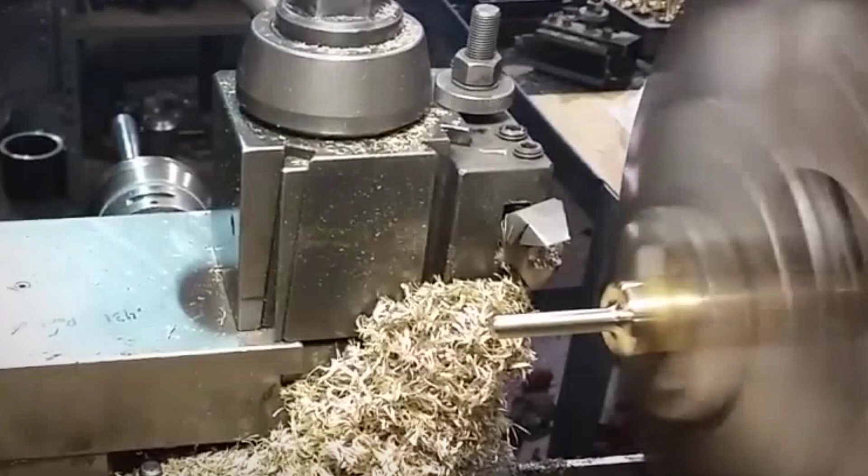There is a valve that costs $10 in raw brass to make. It has no rubber, no springs, no washers, and no seats to replace. It seals tighter the harder the water pushes against it. Victorian plumbers installed them by the millions. Not one was designed to drip.

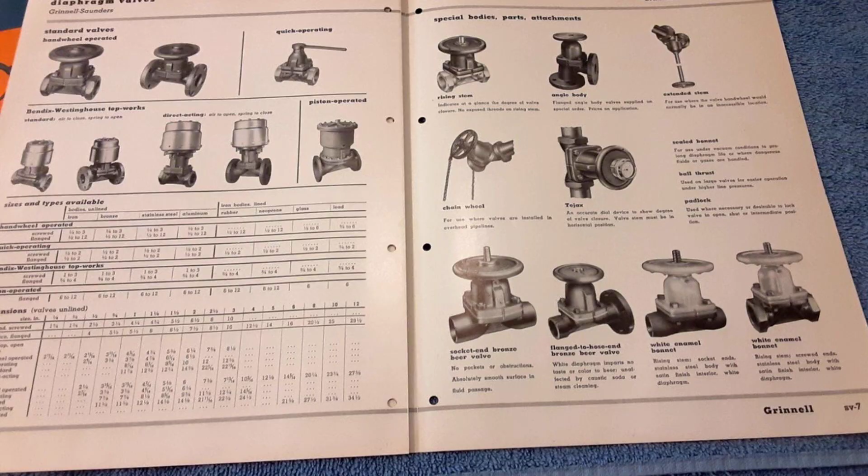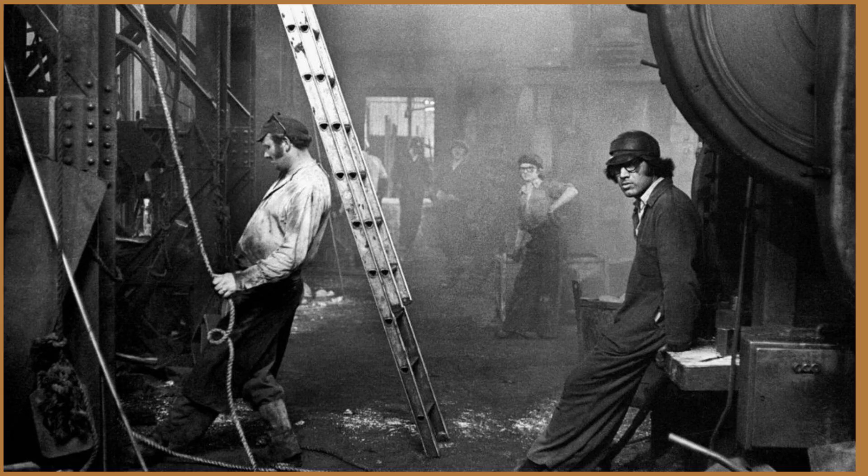We did not abandon this valve because it failed. We abandoned it because it never needed a replacement part. A valve that never leaks does not sell O-ring kits and does not bring the homeowner back to the hardware store every 18 months. This is the story of the ground key valve, the precision brass fitting that sealed itself with physics, and why the plumbing industry buried it under a mountain of rubber washers.

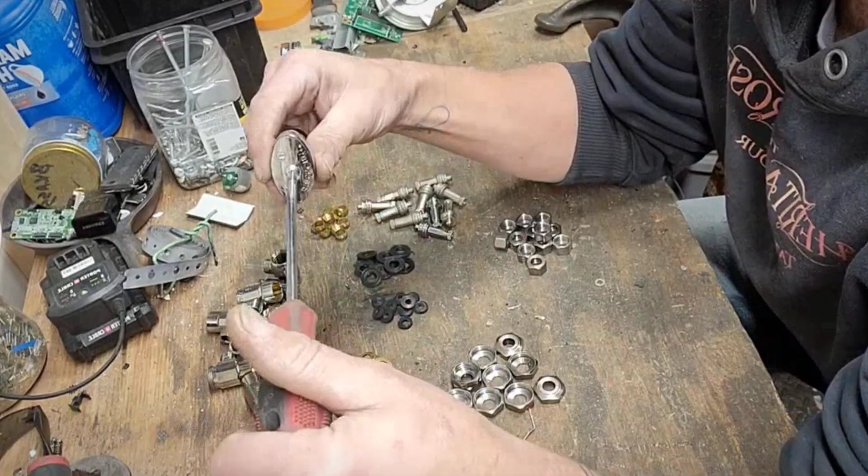In the ruins of Pompeii, archaeologists have uncovered bronze stopcocks with a geometry that feels eerily modern. Each artifact, now labeled in museum catalogs with accession numbers like 2019.142 or 1988.67, reveals the same principle: a conical bronze plug ground to fit a matching seat, turning inside a lead-lined channel. The Romans shaped these valves with a taper close to 1 in 6, about 9.5 degrees, a standard that would survive for nearly 2,000 years.

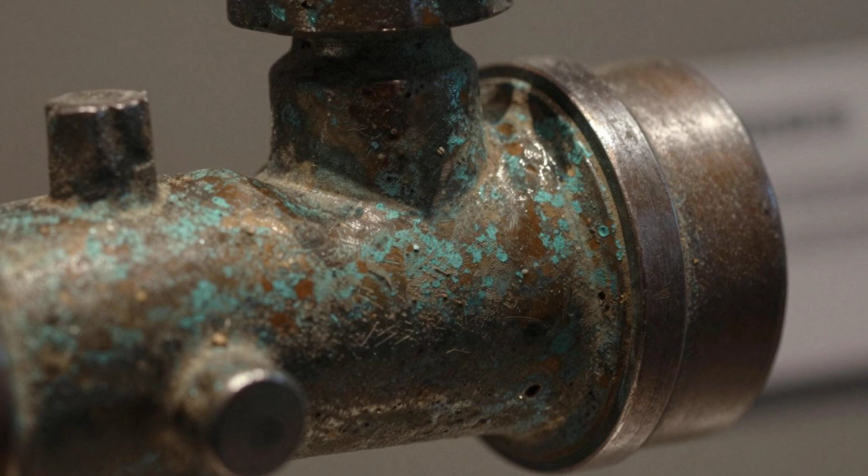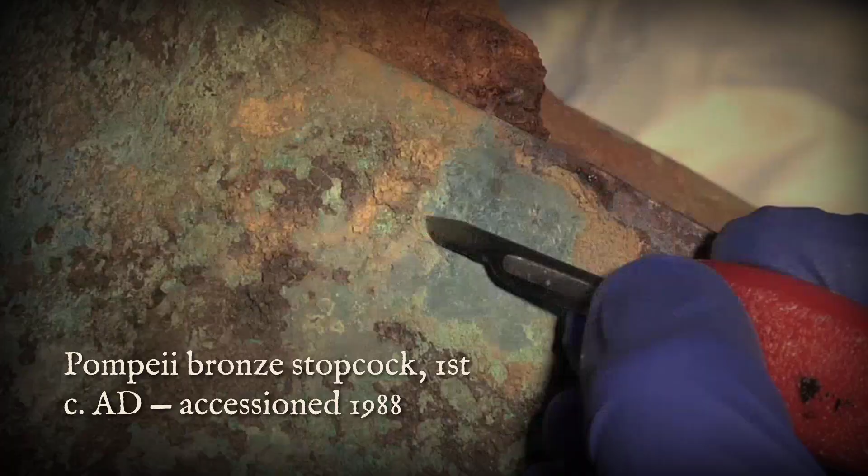Excavation reports from Pompeii's waterworks describe seats that still bear the marks of repeated use, their surfaces polished by centuries of opening and closing. Even after the eruption, after centuries underground, the conical sealing faces remain intact. The Museum of London holds a Roman stopcock accessioned in 1988 that still fits tightly in its socket. The patina has darkened, but the engineering is unmistakable. The bronze key can be withdrawn, cleaned, and reseated.

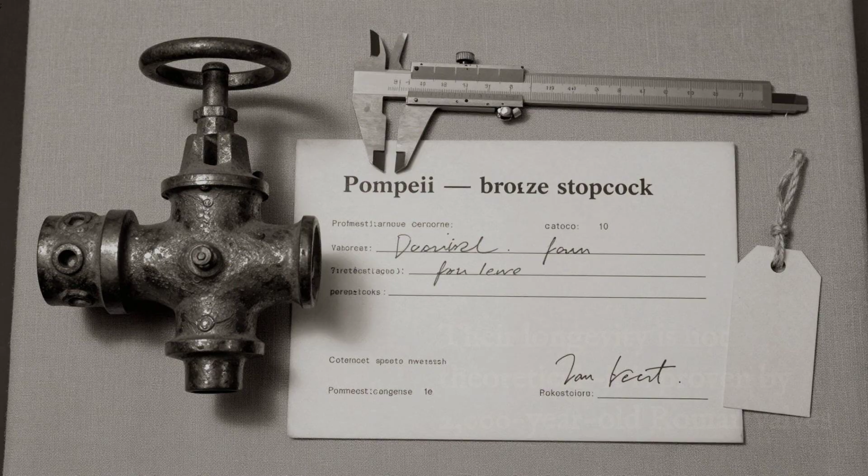No rubber, no washers, no springs. The only thing standing between the city's water and the outside world was the precise fit of two metal surfaces, pressed together by hand and tightened by the very pressure they controlled. These ancient devices did not rely on disposable parts. Their longevity is not theoretical. It is proven by the survival of the artifacts themselves.

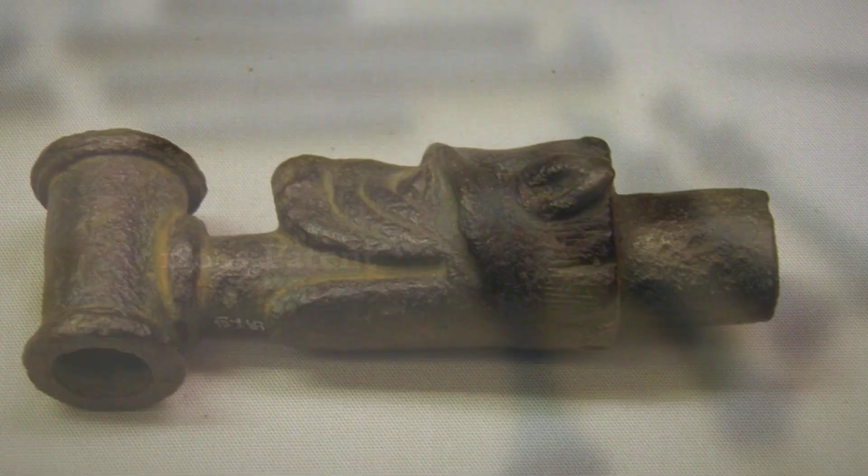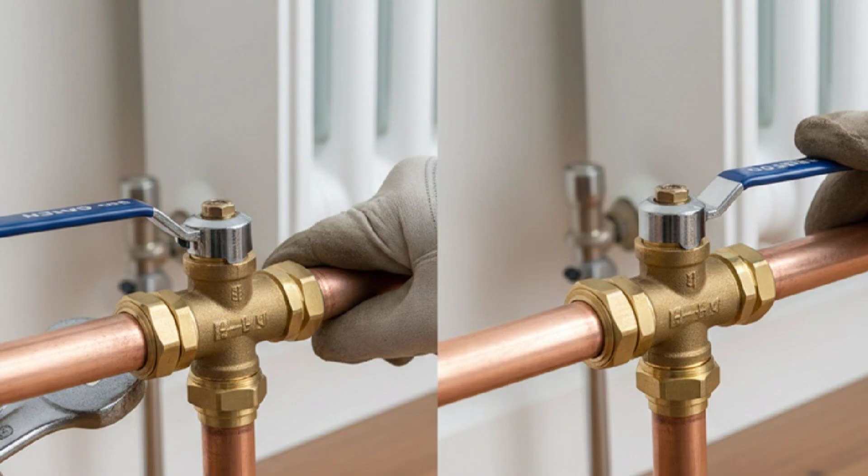The same conical geometry, the same reliance on pressure to enhance the seal, would reappear in the brass foundries of Birmingham 18 centuries later. The Roman stopcock stands as a silent witness. The idea of a self-sealing metal-on-metal valve is not a Victorian invention. It is a rediscovered technology, refined by generations who understood that physics, not planned obsolescence, could keep water in its place for centuries.

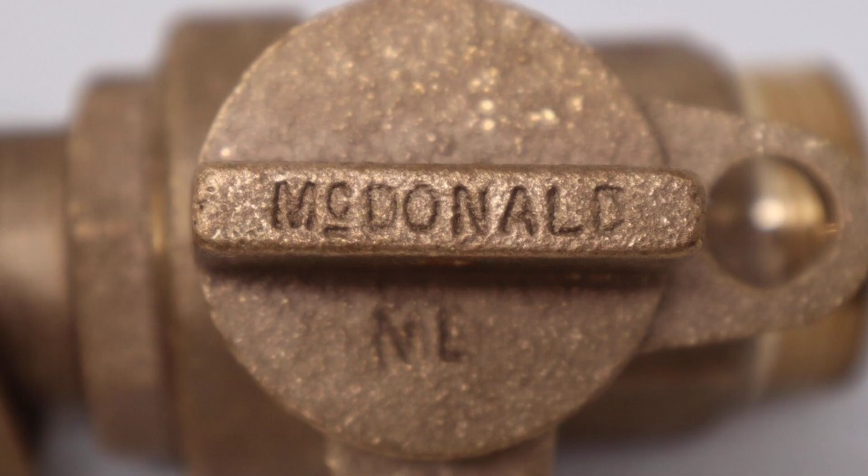On February 12, 1792, a new chapter began in the heart of Birmingham's Foundry District. Patent number 2470, filed by the partnership of Matthew Boulton and John Fothergill, described a stopcock unlike any before it. A brass body precision ground to a 1 in 6 conical taper, operated by a square key, and sealed without a single washer or spring.

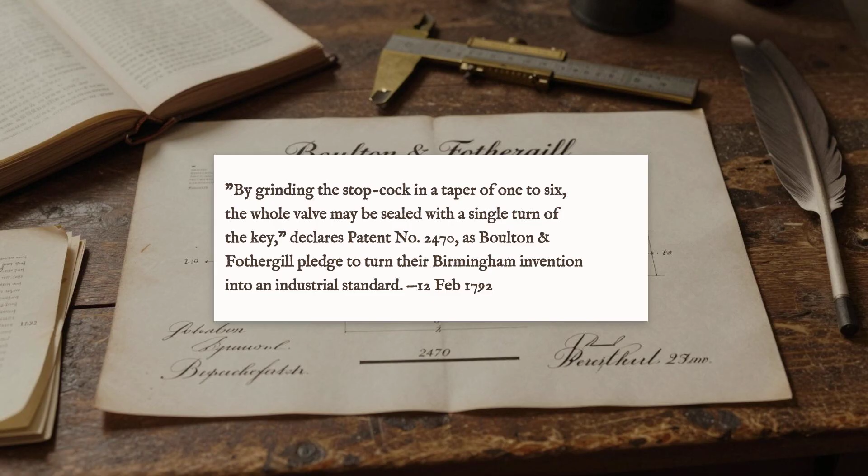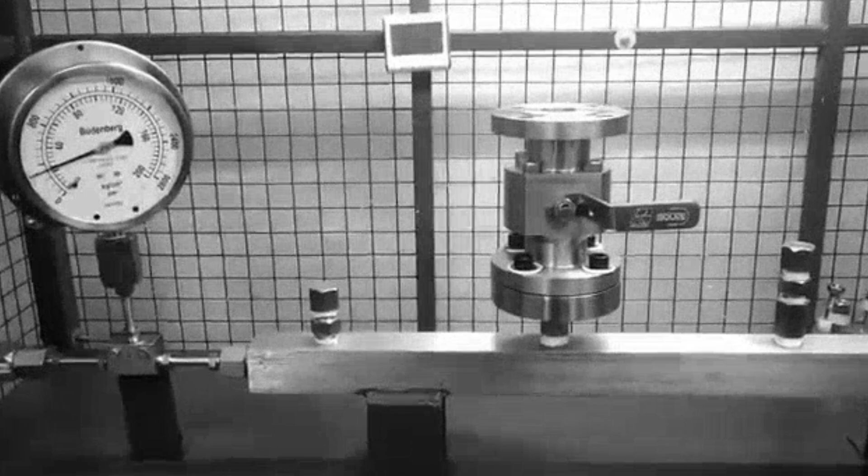The original patent text was blunt in its confidence: the stopcock is ground in a taper of 1 part to 6, whereby the whole of the valve may be sealed with a single turning of the key. The drawing attached to the patent shows every detail: a simple, robust geometry, a cylindrical shell, a conical seat, and a plug that fits so tightly that water pressure itself forces the seal to improve as the system comes under load.

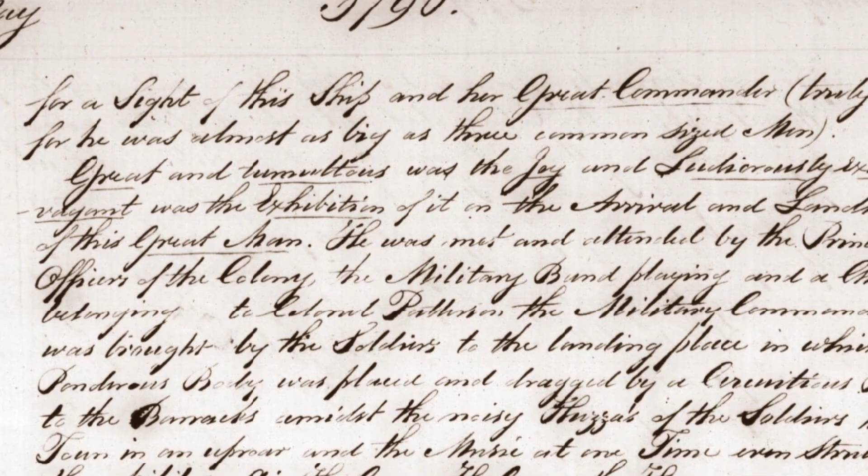This was not an experimental prototype. It was a design ready for industrial scale. Within 3 months of the patent, the Boulton and Fothergill ledger records a shipment delivered to the Corporation of London: 120 brass stopcocks, ground key, 1 in 6 taper, price £3, 2 shillings per dozen. This was not a local curiosity. Orders followed from Paris and Boston, each referencing the Birmingham pattern. The ledgers show a steady flow of finished valves, their destinations stretching across the Atlantic.

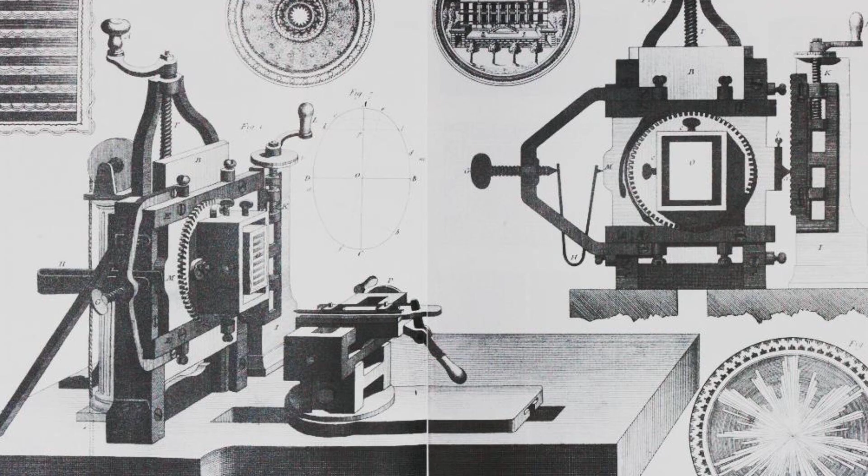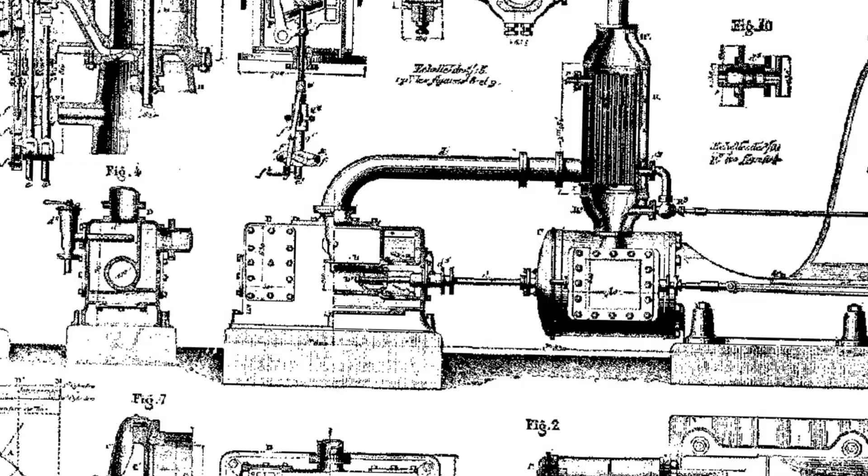The foundry's pattern plate, still preserved in the archives, bears the same measurements as the patent drawing. Guest and Chrimes's 1795 pattern book, Plate 8, would soon engrave the 1-in-6 taper into British engineering memory, describing it as the most perfect seal yet devised. By the close of the 18th century, the ground key valve was not just an invention, it was a product. The archives reveal a deliberate campaign: patent, manufacture, export. The design's simplicity was its strength.

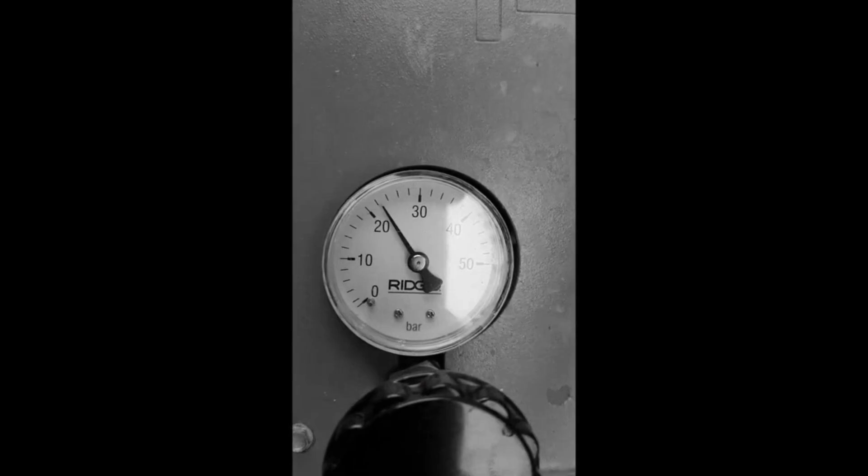No rubber, no consumables, only the physics of brass pressed against brass and the confidence that water pressure would do the rest. The technical proof of this design's promise would come later, but the industrial intent is already clear in the records of 1792. A conical brass plug, ground to a precise 9.5-degree taper, does something no rubber washer can do. It turns water pressure, the very force that tries to break a seal, into the agent that perfects it.

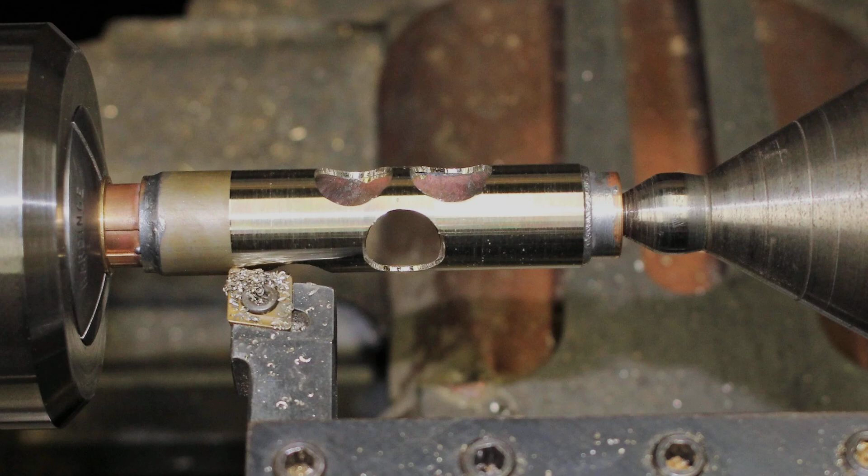The geometry is not accidental. When the plug enters its seat, the taper multiplies the closing force radially, focusing pressure onto a narrow, almost invisible line of contact. With every turn of the key, that line becomes tighter, the contact area grows, and the valve transforms from a simple fitting into a self-tightening barrier.

This is the genius behind the ground key valve. The surfaces are lapped, polished with fine abrasive until they mate so closely that a human hair cannot slip between them. Under a microscope, the finish reveals a landscape of micro-ridges flattened by careful handwork. Each time the valve is closed, the brass at the sealing edge undergoes work hardening. The grains in the metal, once soft and yielding at 60 on the Brinell scale, compress and realign, doubling their resistance to deformation.

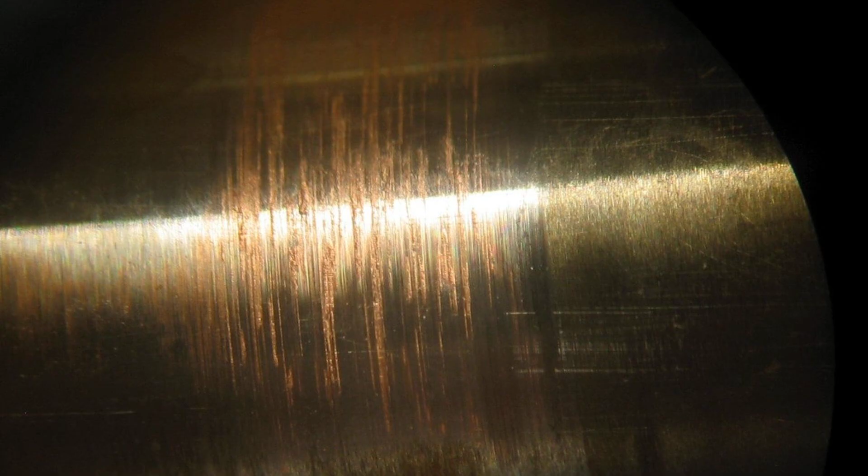In laboratory tests, that rim reaches 120 on the Brinell scale after repeated cycles, hard enough to resist scoring, yet still able to conform minutely to the opposite face. The result is a seal that improves with use.

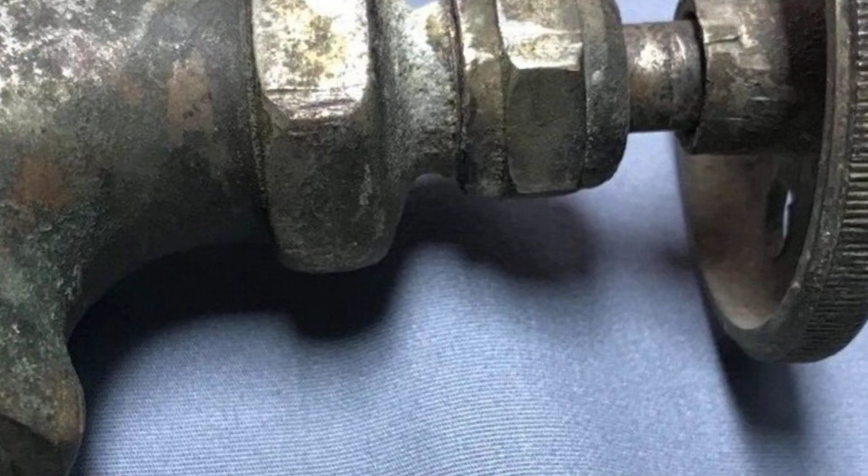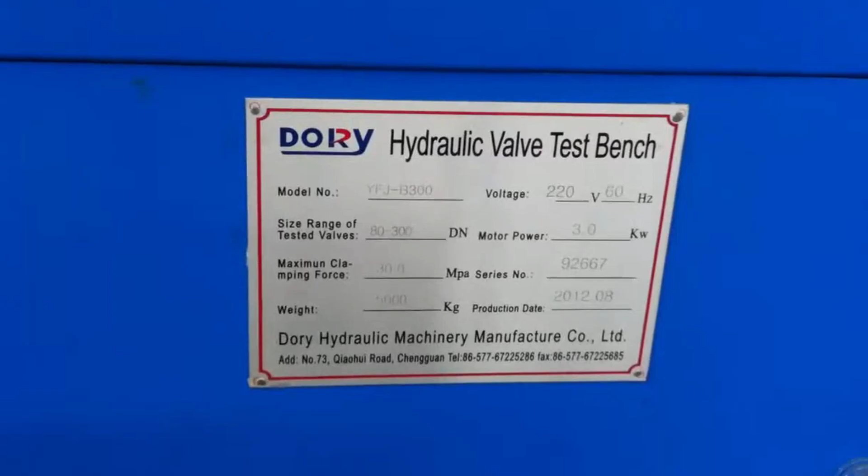Unlike rubber, which flattens and cracks, the brass-on-brass interface adapts, hardens, and becomes more leak-tight as the years pass. The pressure inside the pipe, whether a trickle or 600 pounds per square inch, only drives the plug deeper into its seat, amplifying the radial load and closing any microscopic gaps.

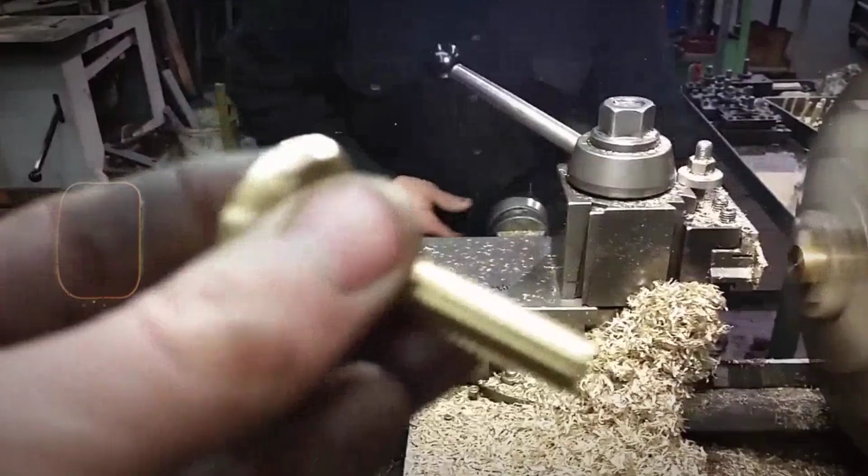There are no springs, no washers, no parts to replace. The valve's integrity is written in its geometry and the physics of cold-worked brass, a design that, once set, asks nothing but to be turned.

A brass ground key valve faces the pressure chamber, a relic of Victorian engineering, weighed and measured by modern instruments. The dial climbs past 100, then 400, then 600 pounds per square inch. Inside, a conical plug, lapped to a mirror finish, presses into its seat.

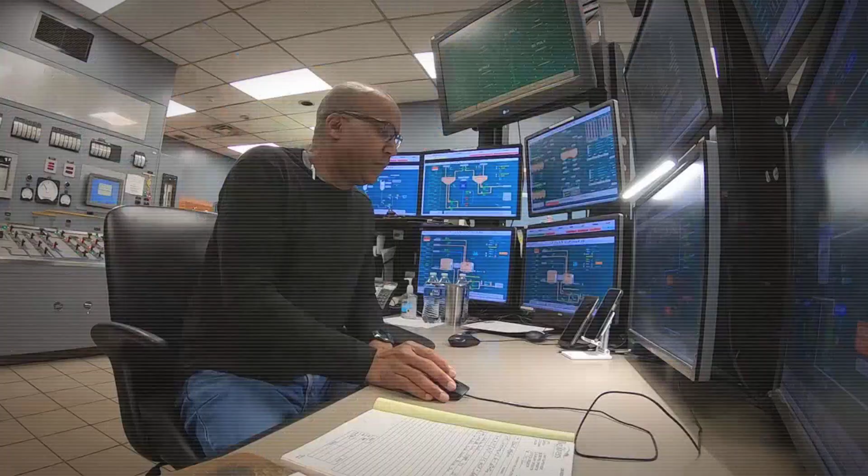The water, forced by the pump, seeks the faintest path to escape. Sensors track every molecule. The calibrated mass flow meter, with a threshold of 1/100th of a milliliter per hour, records no surge, no spike, just a flat line.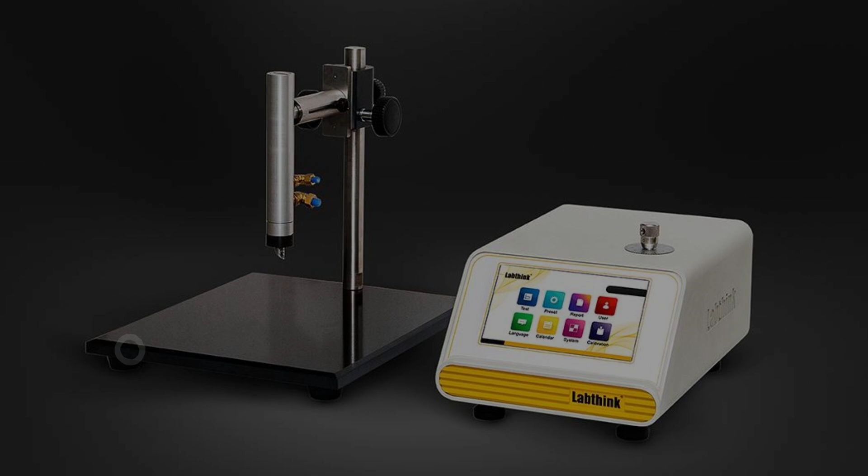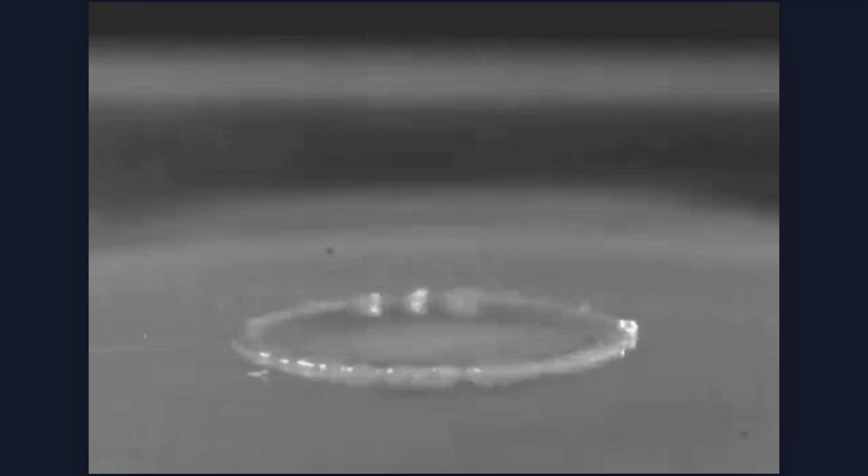Over 60 minutes at 600 pounds per square inch, the leak rate never rises above 0.05 milliliters per hour. That is one drop, less than half the volume of a single raindrop, in an entire hour.

For context, a typical household line runs at barely 80 pounds per square inch. Most modern shutoffs are never asked to withstand more than a fraction of this pressure.

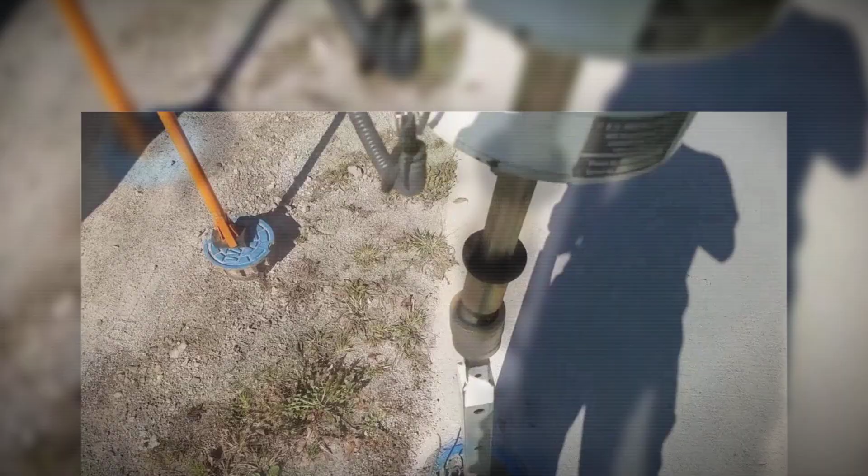The test is repeated. The valve is cycled open and closed 10,000 times, then repressurized. The readings hold steady. The micrographs, taken before and after the test, reveal a rim of brass transformed.

Under magnification, the contact band glows with a denser, finer grain, evidence of work hardening, not wear. The surface, once soft at a Brinell hardness of 60, now registers double that figure. The line of contact, invisible to the naked eye, becomes a fortress at the molecular level.

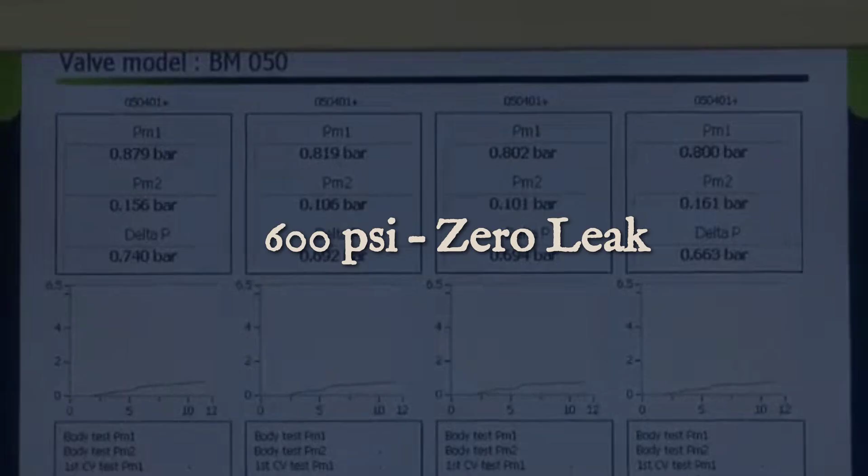Industry standards for new valves allow 10 times this leak rate at half the pressure. Yet here, physics and precision machining do what rubber cannot. The higher the pressure, the tighter the seal.

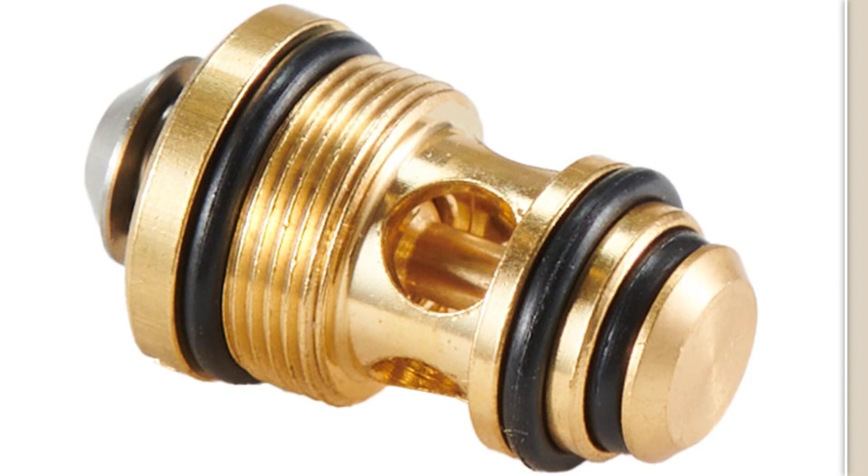No washers, no springs, no disposable parts. Just a self-tightening barrier, validated by numbers that leave no room for doubt.

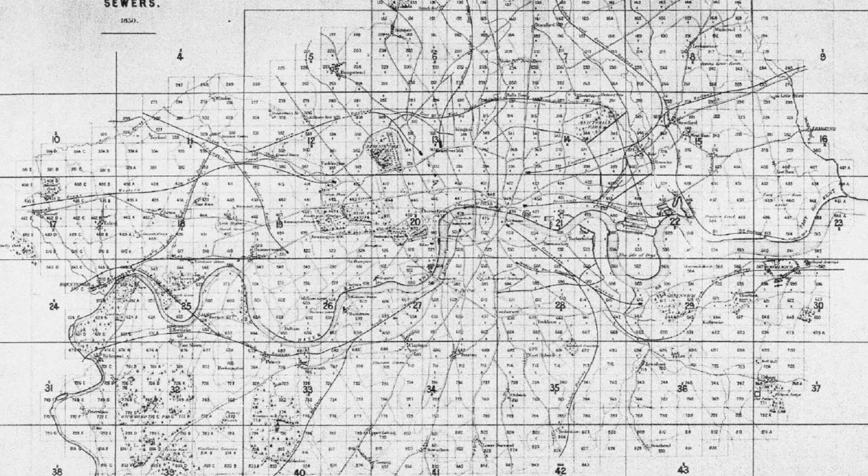By the 1850s, the ground key valve was the quiet force behind city life. London's waterboard records show entire mains beneath the Thames embankment, built around these brass stopcocks. On March 30th, 1852, the board approved 200 ground key valves, citing their proven durability and ease of maintenance.

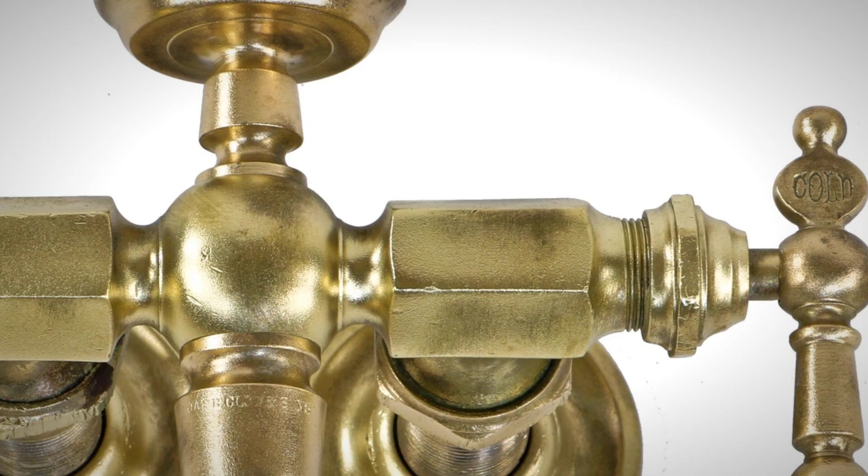These were not just claims on paper. One valve installed in 1867 stayed in flawless service for 36 years, replaced only when new pipework demanded a different fit. Paris followed suit. In 1860, the city's water board ordered ground key stopcocks for the Canal de l'Ourcq.

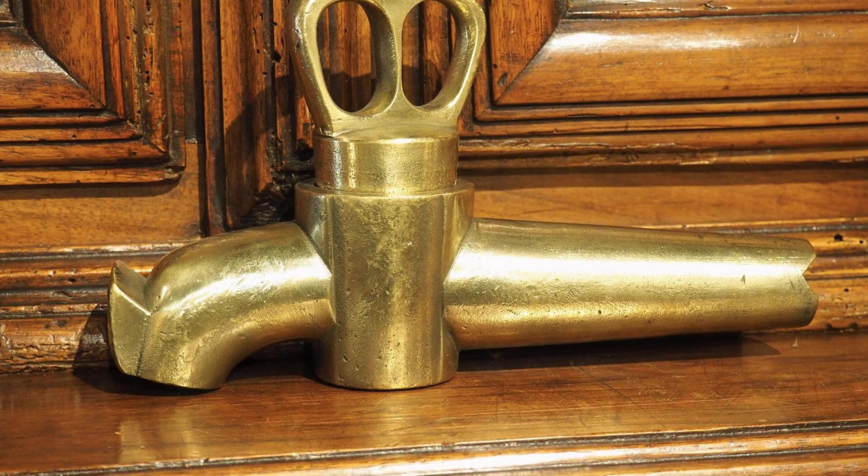Three decades later, engineers found those same valves still in place, their brass faces showing no measurable wear after years of mineral-rich water. Reports noted the only maintenance needed was a little grease on the key, no washers to swap, no springs to fail. Water quality tests at the valve sites found zero contamination, a standard later rubber-sealed valves could not match. Boston's water department made the ground key valve its standard shutoff.

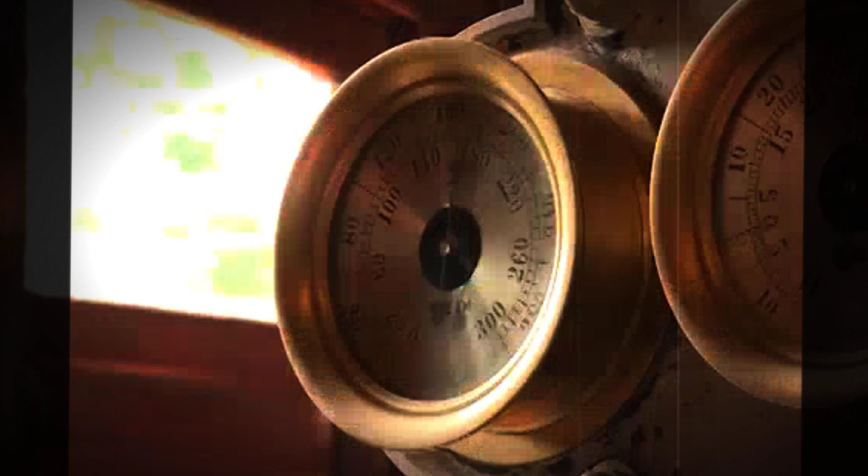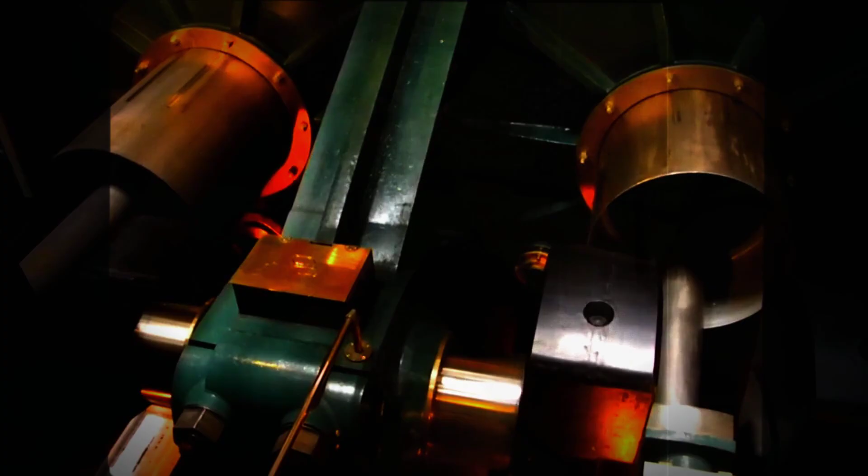An 1882 report lists them as the default, with crews trained to service the key-driven mechanism. Inspections in 1915 and 1940 found the original valves still sealing perfectly, untouched by corrosion, needing only the occasional application of grease. The Royal Navy trusted the same design as it shifted from sail to steam.

Admiralty manuals required ground key valves for boiler feed and condensate lines, each one holding 800 pounds per square inch of steam, without a hint of leakage. In the engine rooms of ironclads, naval engineers, often overlooked, relied on the precise taper and lapped brass seat to keep water and steam safely contained.

Pattern books from Guest and Chrimes in 1902 set the standard, publishing exact dimensions to ensure every valve from Sheffield or Birmingham would fit and function identically, whether destined for a city street or a warship at sea.

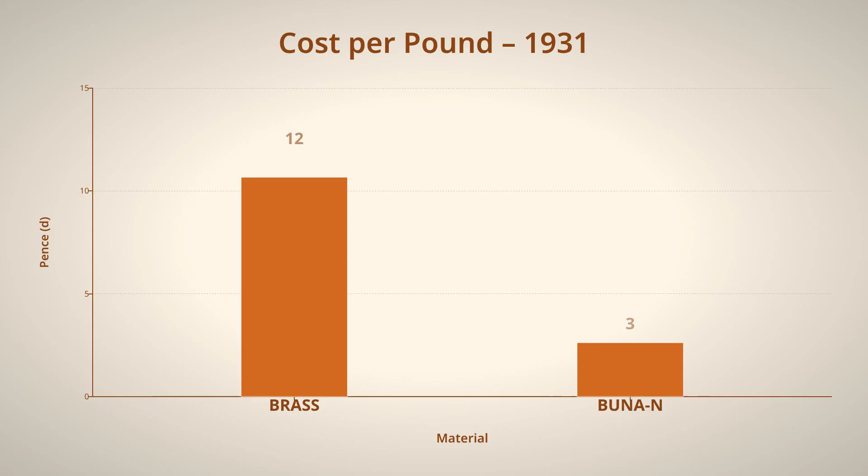By the early 1930s, the economic argument for rubber was impossible to ignore. Brass, once the backbone of municipal infrastructure, now cost 12 pence per pound, while synthetic Buna N rubber, newly arrived from the chemical plants of Germany and the United States, could be had for 3 pence.

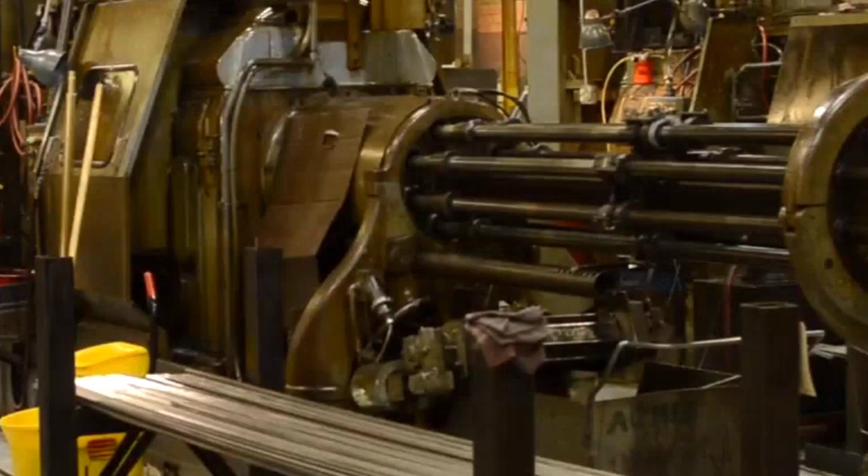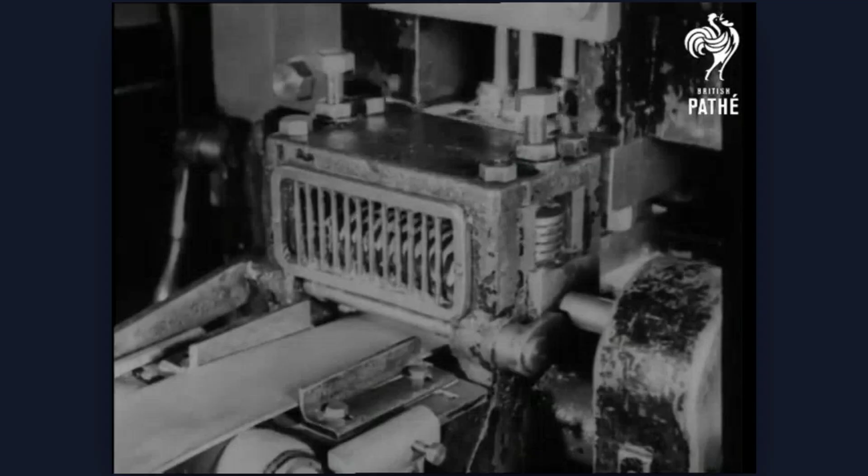Price tables from London Metal Exchange bulletins and Rubber Manufacturers Association reports told a simple story. A raw material cost four times lower, multiplied across millions of fixtures. A brass ground key valve needed half a pound of metal just to start. The new washer-based shutoff used a thin steel shell and a sliver of rubber, dropping the material cost to pennies.

Manufacturers did not hesitate. In the pages of Plumbing Engineer, trade journals began to praise the economy and ease of assembly of the washer valve. The numbers in the ledgers were clear, but the cost-cutting ran deeper than materials.

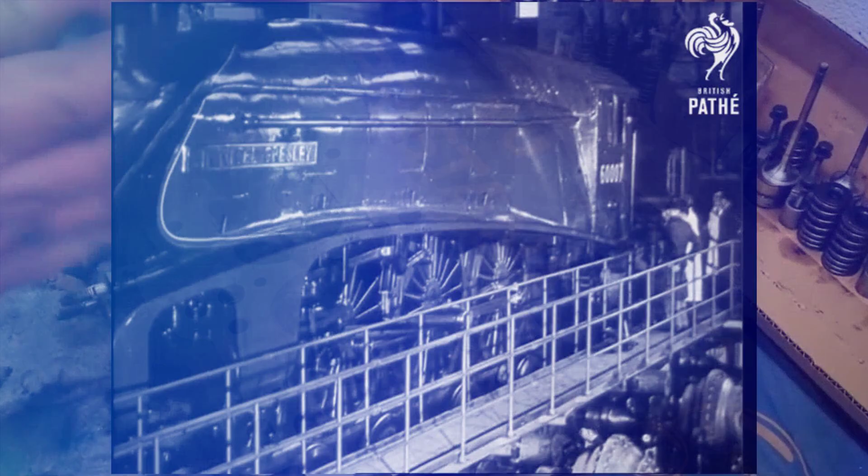On the shop floor, the skills that once defined a craftsman, lapping a taper to within a fraction of a degree, reading the grain of the brass, fitting a plug so precisely that water pressure alone would finish the seal, became obsolete almost overnight.

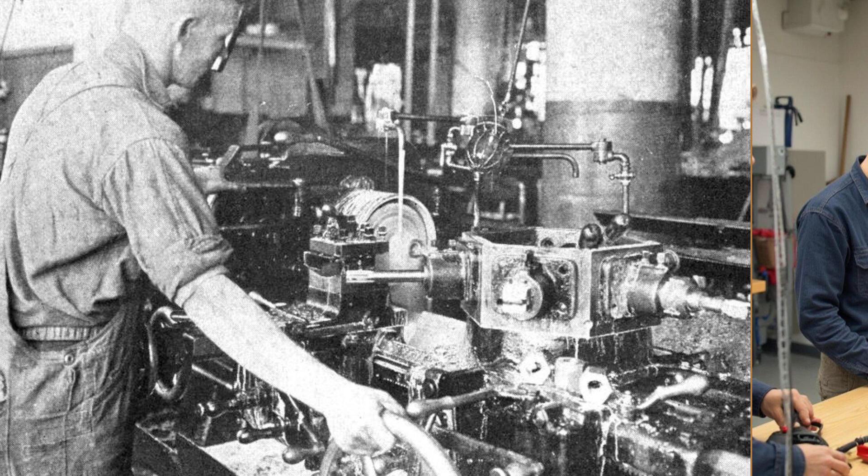Trade schools responded. By 1960, apprenticeship curricula in both Britain and the United States had rewritten their syllabi. Where once students spent months mastering the art of hand-lapping a valve seat, the new textbooks featured torque tables for rubber washers and diagrams of cartridge assemblies.

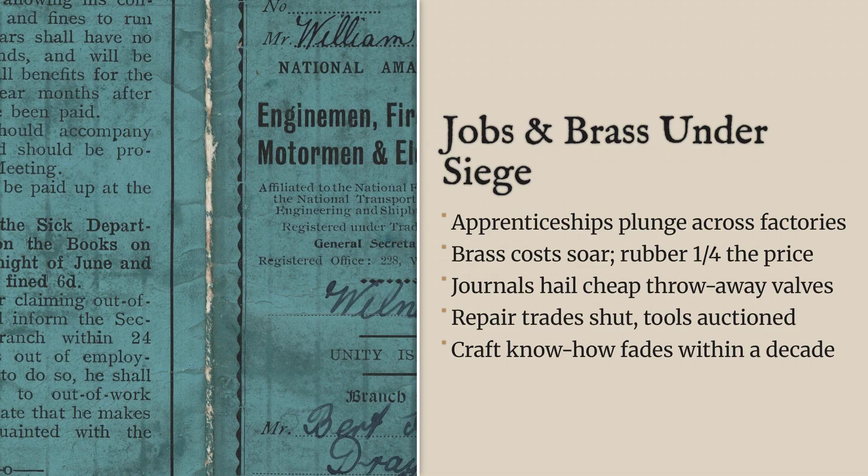The Amalgamated Engineering Union's annual reports and Ministry of Labor returns recorded the fallout: a 45% drop in plumbing apprenticeships between 1935 and 1945. The old skills faded as quickly as the machines that once kept them alive.

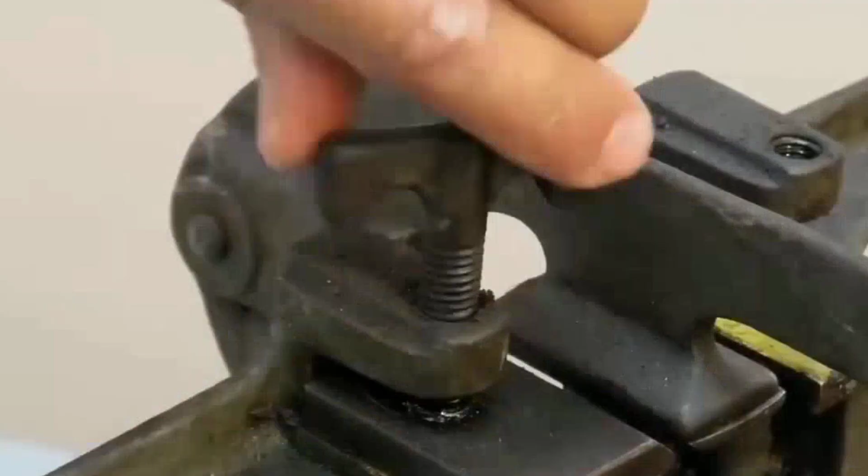A feedback loop took hold. Fewer skilled hands meant fewer ground key valves produced, just as manufacturers, chasing the post-war housing boom, standardized on disposable designs. The new economy thrived on replacement cycles, O-rings, washers, proprietary cartridges, all destined for the hardware store shelf. The logic was not technical failure, but economic convenience. The ground key valve, with its promise of a lifetime seal and no consumable parts, had become a liability in a market built on planned obsolescence.

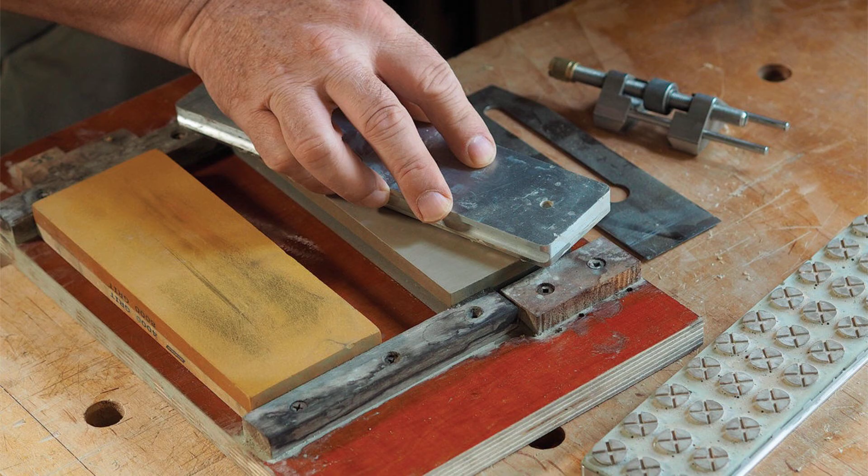What was lost was not just a product, but a body of knowledge, a way of thinking that valued restoration over replacement and precision over disposability.

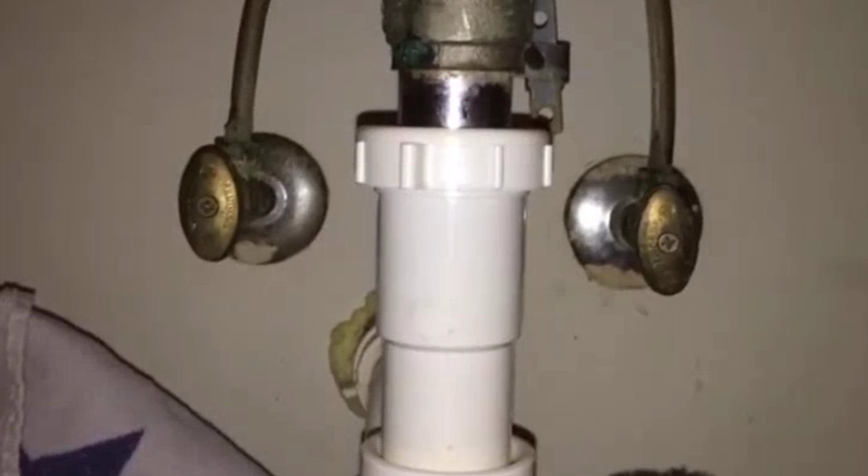1 trillion gallons of water vanish from American supply lines each year, lost not to drought, but to leaks. EPA's own reports trace much of this waste to the silent failure of rubber-sealed valves, the kind found in nearly every home, apartment, and office.

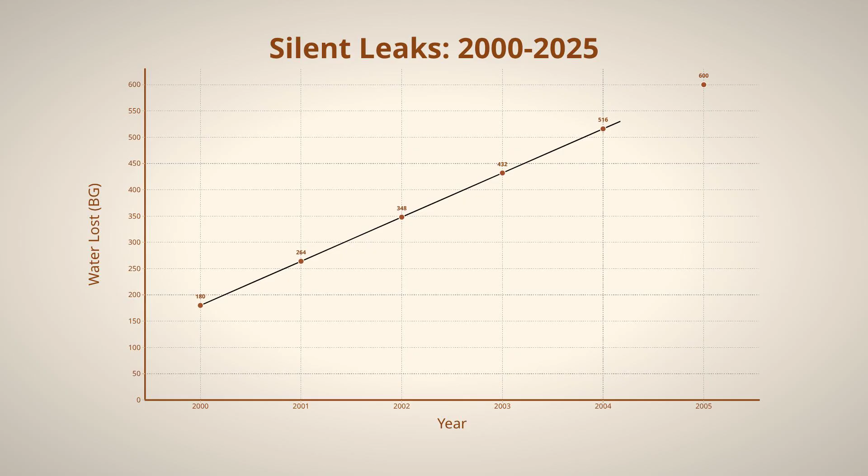Inside the walls, behind the fixtures, a slow drip begins. Not a burst, but a creeping seep, undetectable until the numbers appear on the city ledger. The scale is staggering. Enough water to supply Los Angeles for a decade, surrendered drop by drop to a flaw built into the system.

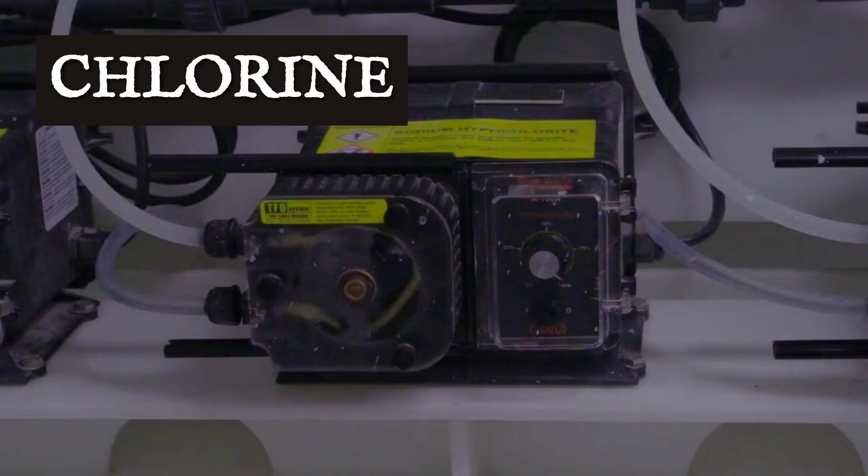Rubber, once hailed as a miracle material, cannot withstand the assault of modern water chemistry. Chlorine, added to keep water safe, reacts with the unsaturated bonds in synthetic washers and O-rings. Laboratory tests show a 30% drop in sealing force after just 5 years in chlorinated municipal water. The rubber hardens, cracks, and loses its grip.

Each cycle of pressure and release widens the breach. Unlike brass on brass, which only tightens under load, these seals are doomed from the moment they leave the factory.

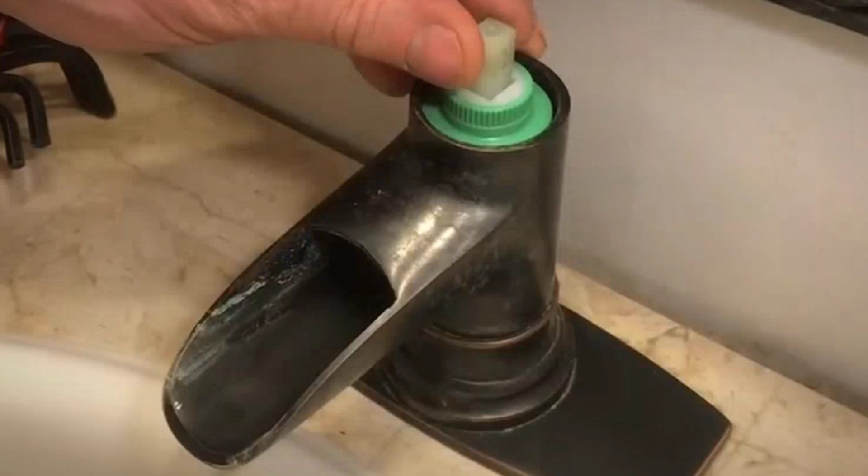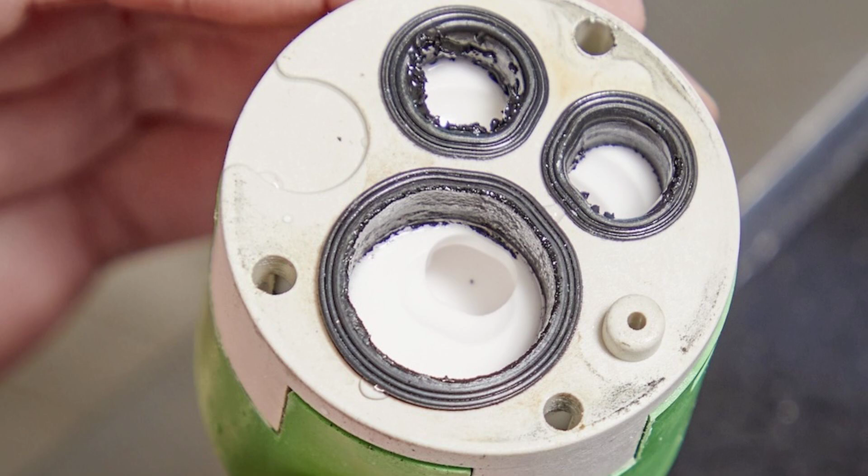The market has adapted, not by fixing the problem, but by making it routine. 70% of new residential valves now rely on proprietary cartridges, plastic and rubber assemblies engineered for rapid replacement, not restoration. Hardware stores devote entire aisles to repair kits, O-rings, and brand-specific cartridges.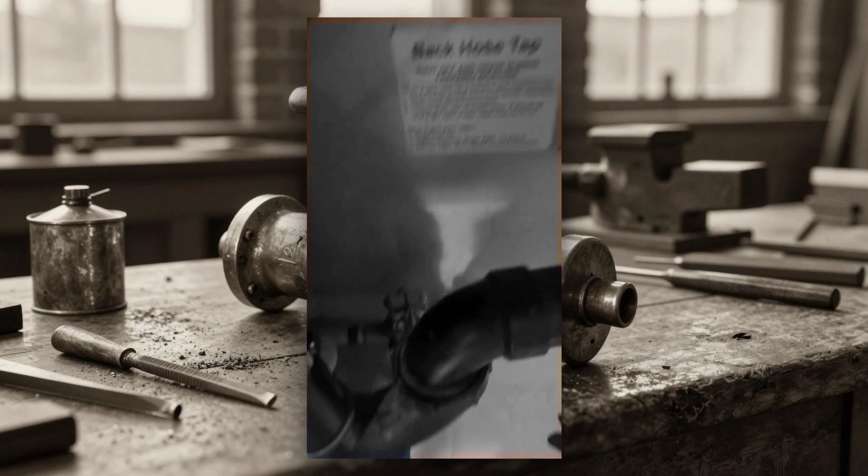The consumer, locked into a cycle of recurring purchases, rarely questions why a shutoff must be serviced every few years, or why a device once built to last a century is now disposable by design.

The cost is measured in more than water bills. Every failed seal means another trip to the store, another piece of rubber destined for landfill, another skill lost as the trade shifts from craftsmanship to cartridge swaps.

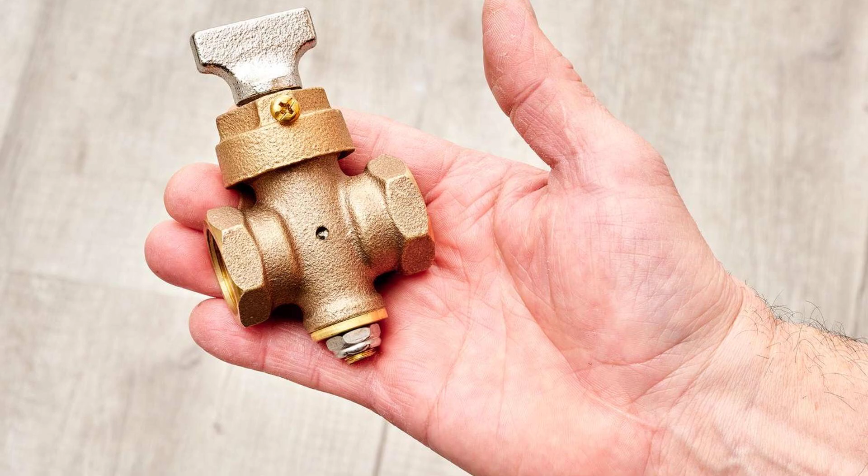The ground key valve, immune to chlorine, indifferent to pressure spikes, and built for restoration instead of replacement, stands as a rebuke to this engineered obsolescence.

The numbers are not just statistics. They are the record of a choice, repeated millions of times, that trades resilience for convenience and leaves the bill for someone else to pay.

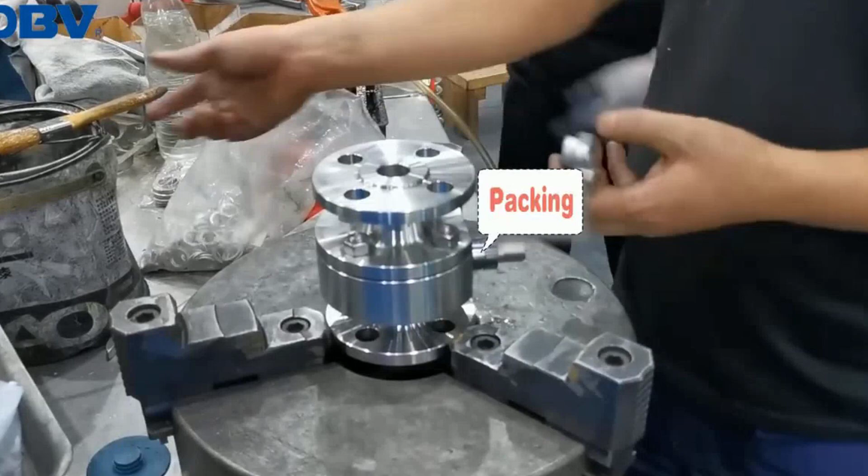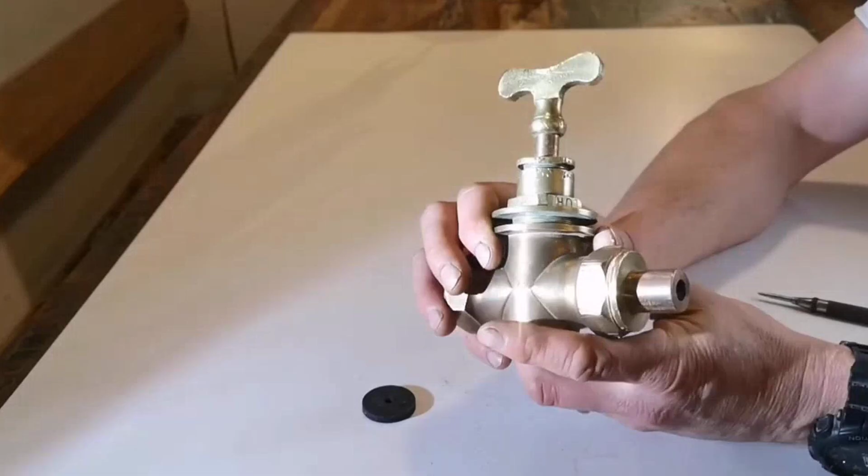Metal-seated valves remain the backbone of gas safety, their design mandated by law wherever high-pressure lines run beneath city streets. The UK gas safety installation and use regulations, enforced since 1998, require a ground key or similar metal-to-metal shutoff.

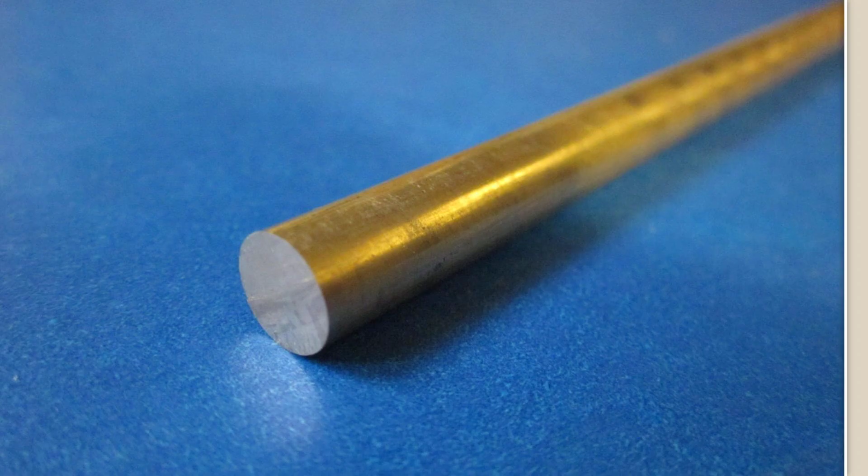British Standard EN 12567 details the geometry, 1 in 6 taper, minimum CuZn30 brass, and a leak rate under 0.1 milliliters per hour at 150 psi. Inspectors arrive with calibrated rigs, pressure decay tests, and the authority to reject any valve that fails the Victorian benchmark.

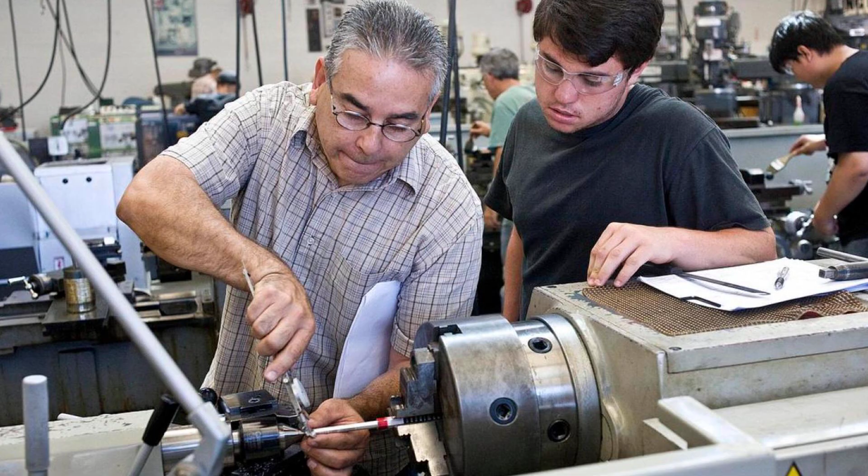Here, the ground key design is not a relic, but a living standard, trusted, where failure is not an option. In the West Midlands and Boston Seaport, heritage workshops preserve the craft.

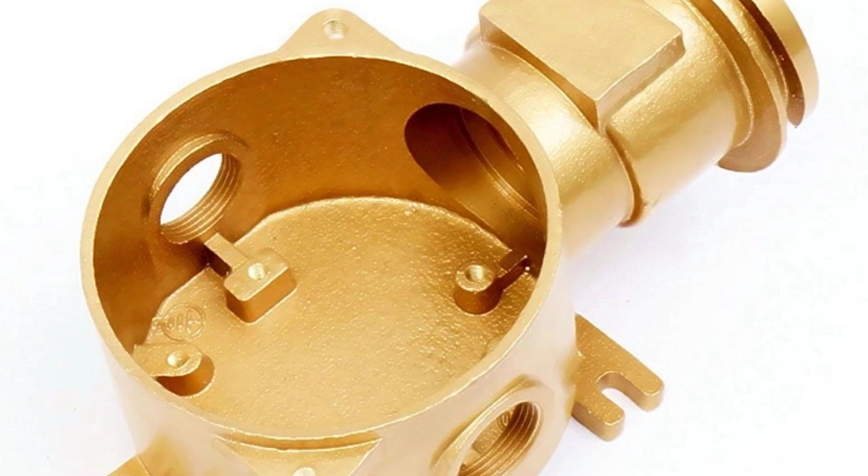At the Heritage Brass Foundry in Smethwick, the master turner guides apprentices to lap conical seats until a hair cannot pass. Each valve is cast, bored, and polished by hand, then cycled under pressure.

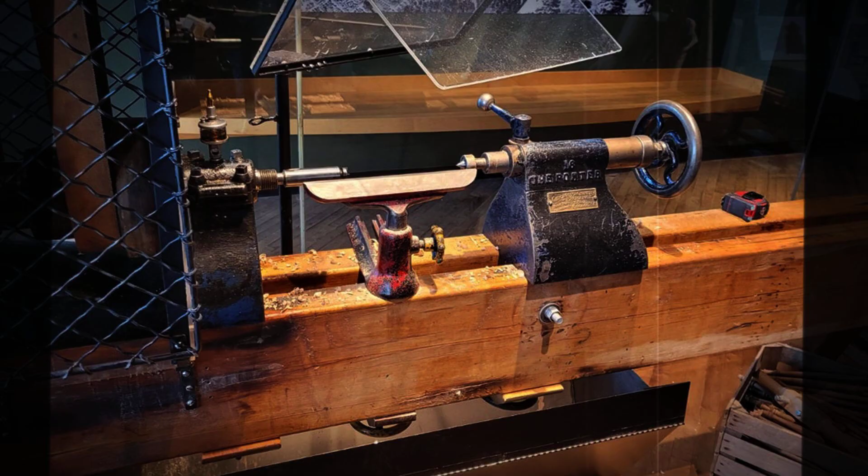The Old World Valve Company restores municipal stopcocks for museum displays and functioning heritage mains, using century-old lathes. Their clients are city engineers, museum curators, and homeowners determined to keep Victorian mains alive.

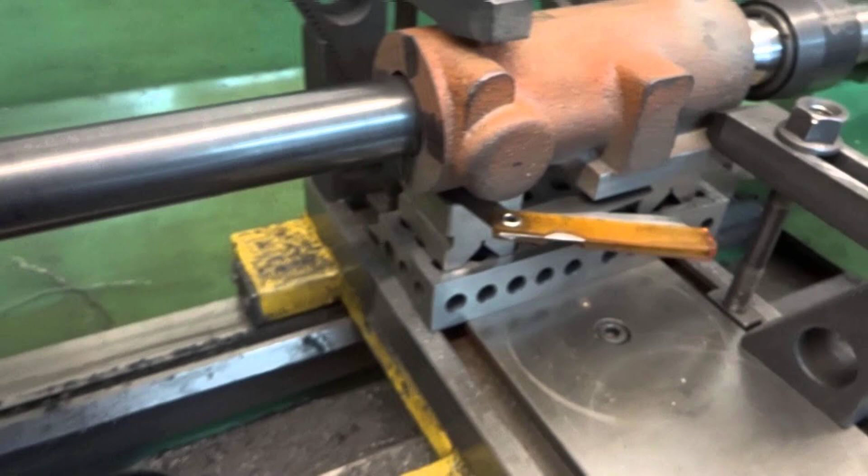The process is methodical: rebore, lap, assemble, test. No rubber, no cartridges, no planned failure. Each restored valve proves that durability is a deliberate choice.

Industrial plants have never left the ground key principle behind. Nuclear power station audits cite the self-tightening seal as essential for secondary coolant loops. A 2019 Magnox report names the pressure-assisted brass seat as the only design able to withstand radiation embrittlement and 1,500 psi without measurable seepage.

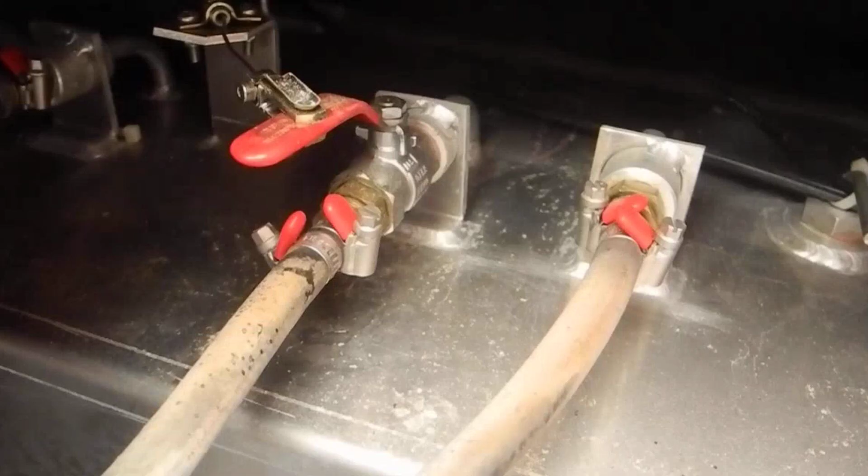Petrochemical facilities specify ground key shutoffs for lines carrying solvents that would dissolve any elastomer. In these places, the old design is not nostalgia, it is necessity.

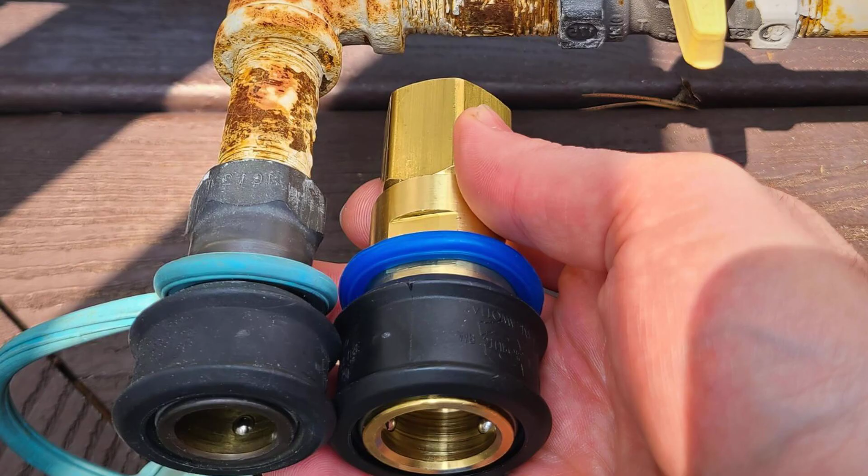Today, the same brass-on-brass geometry still guards gas lines under city streets, trusted where failure is unthinkable. Meanwhile, billions of gallons leak from disposable valves designed to be replaced, not restored. The ground key's secret was never its cost, but its threat to the business of planned obsolescence.

The loss is not just a trade, it is a form of resilience we are letting slip through our fingers. What would it mean to reclaim it?